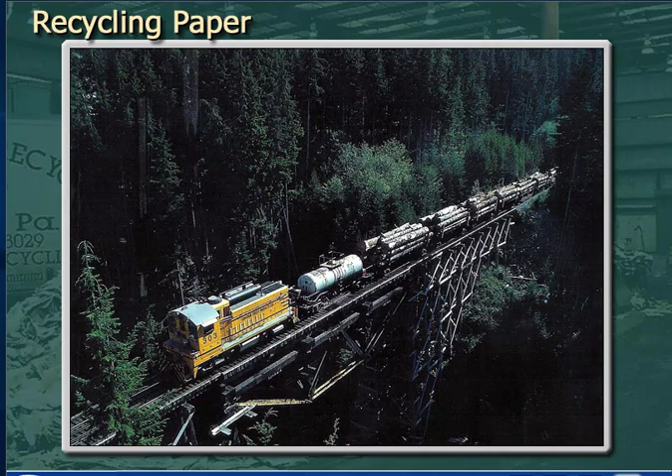The U.S., for example, has increased paper recycling in recent years so that now 50% of all paper used there is recycled. Some of this recycled fiber is shipped overseas, but recovered fiber still makes up close to 40% of all the fiber used to make paper and paperboard products in the U.S. Every day, paper makers recycle enough paper to fill a 15-mile-long train.

A new goal has been set to increase recycling to 55% by 2012. That goal represents an increase over today's paper recovery levels by the equivalent of 23 Empire State Buildings annually filled with paper. Paper recycling has good support from the government, consumers, and paper companies.

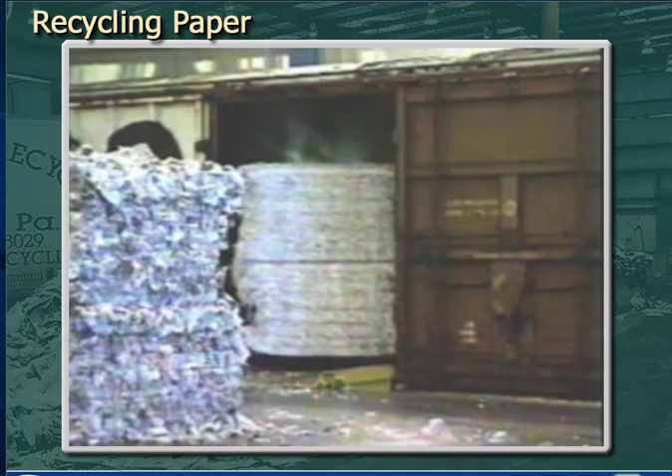But in the long run, it's economics that drive recycling. In countries that have a ready supply of virgin fiber, that is wood, if recycling doesn't make good business sense, it won't happen. From the papermaker's standpoint, waste paper can be a good fiber source, competitive in price to kraft pulp made at the mill and cheaper than purchased virgin pulp.

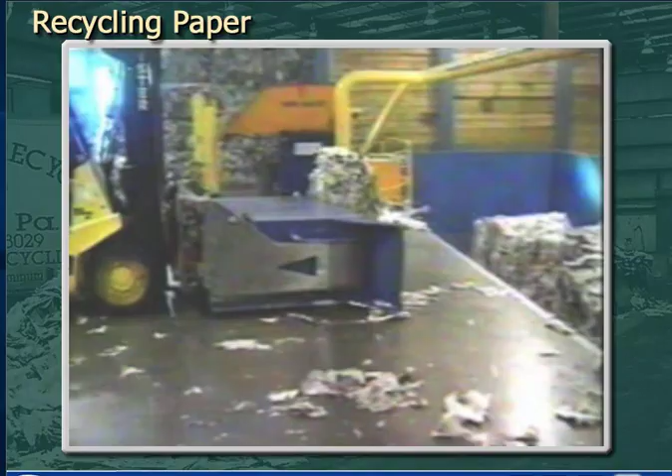Many mills use recycled fiber to increase their fiber supply instead of building new kraft pulp mill capacity. Smaller recycled paper mills can be located in industrial parks near the urban forest and near the mill's customers.

From the standpoint of the consumer, that is you and me, recycling keeps good paper from being thrown into our landfills. Recycling also takes the pressure off our forests to supply all the fiber we would otherwise need. We have more trees now than we did 70 years ago, and recycling is an integral part of our sustainable forest.

Let's review the different types of recycled paper. Recycled paper is classified as either post-consumer or pre-consumer waste.

Post-consumer waste is paper which has been converted into a product, served the purpose for which it was intended, and then discarded by the user. A good example of post-consumer waste paper is old newspapers, or ONP.

Pre-consumer waste is paper created in a manufacturing or converting operation. An example is box plant trimmings and scrap, sometimes called double-lined kraft, or DLK, which is waste generated in the manufacture of corrugated boxes.

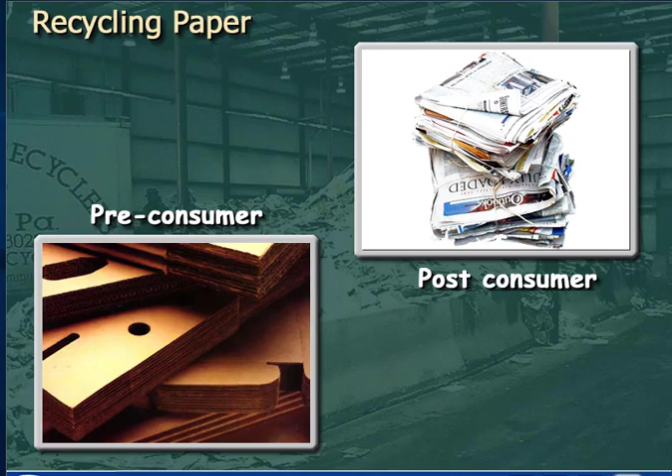For the most part, post-consumer waste has more contaminants and is considered a lower quality grade of recycled fiber. There are a lot of different grades or classifications for recycled papers, but let's look at some of the more common ones.

The easiest paper product to recycle is used corrugated boxes. Over 95% of the goods we use daily are shipped in corrugated boxes, and 30% of the paper produced worldwide is used to make corrugated boxes. That's around 100 million metric tons of corrugated boxes produced every year.

Many businesses have a compactor that bales old corrugated containers, or OCC, and many municipalities collect OCC from homeowners. In fact, in North America, around 75% of all corrugated boxes are collected, baled, and sold as OCC. No other grade of paper is so widely recycled.

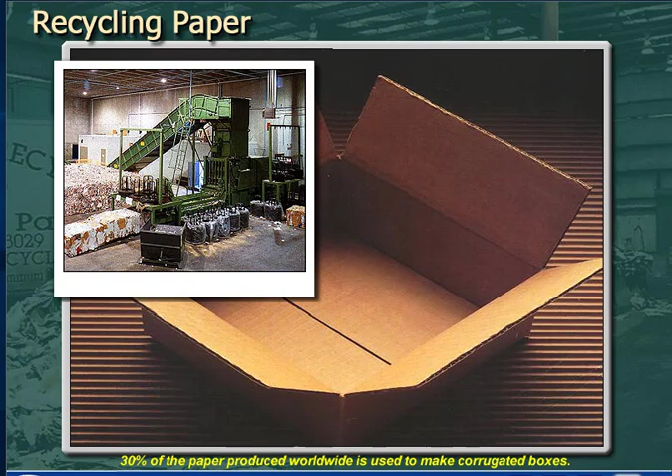What happens to all that OCC? Well, the majority is recycled into other brown grades of paper or paperboard. The most common reuse is to make corrugating medium and linerboard, which are the components glued together to produce corrugated boxes. Let's look at how OCC is processed to become pulp for these grades of paperboard.

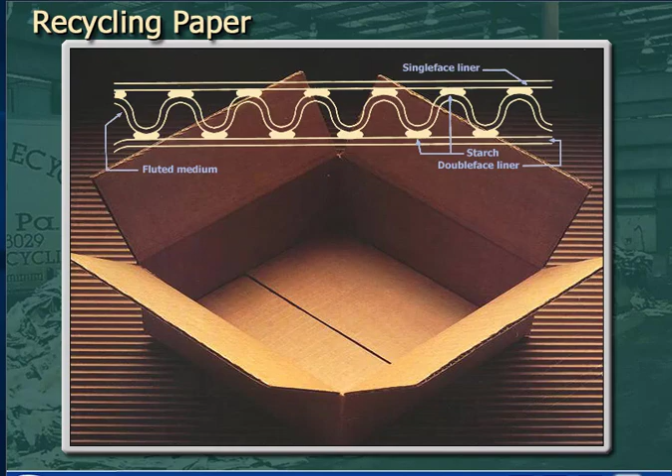You might think that when you buy OCC, one bale is pretty much like another, but that's not true.

Depending on the supplier and the source that the used boxes were collected from, there may be a wide variation in the level of contamination. OCC from one source may be clean and free of other waste paper and foreign material, while another source may be full of contaminants. What are contaminants? Anything that you don't want in the final product.

The stories of bales of OCC containing shoes, guns, money, engine blocks, bowling pins, and entire desks are true, even though hopefully they're not an everyday occurrence. More commonly, the problem contaminants are hot melt glues, waxes, tape adhesives, and other stickies as they're called in the paper mill.

So step 1 in the recycling process is to inspect and sort the incoming bales of recycled paper for quality. Remember, the cleaner the incoming waste paper, the easier it is to recycle it into clean new paper. Really bad bales can be rejected, and other bales can be separated based on the suspected level of contaminants. Then the cleanest bales can be mixed with more contaminated ones to keep the level of contaminants under control.

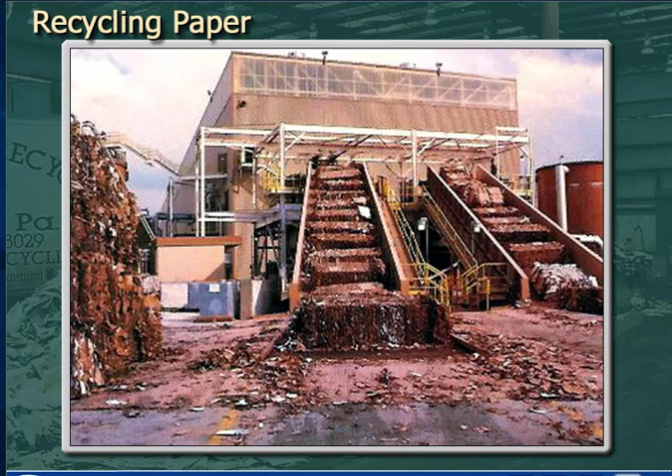Once bales are sorted, they're fed into the pulper so the OCC can be broken up into the individual fibers, that is, to make the OCC into pulp. A conventional pulper looks a lot like a kitchen blender. There's a tub with a rotor in the bottom. Bales are mixed with hot water and the action of the rotor breaks the fibers in the paper apart.

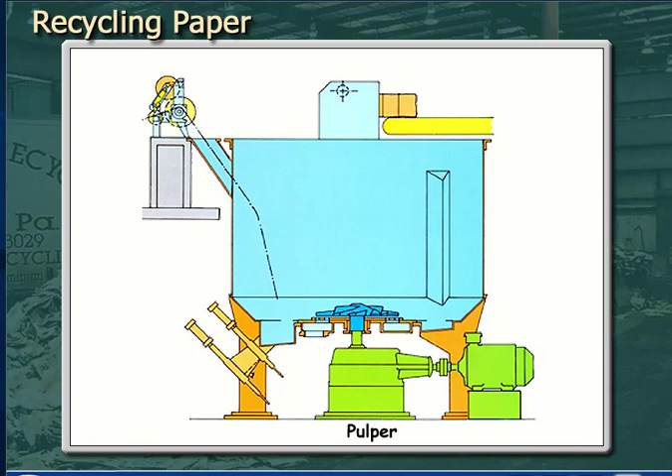Pulpers may be set up to run in batch mode, but most pulpers for OCC are set up to run on a continuous basis. That is, the bales of waste paper are continuously being fed into the pulper along with hot water, and the pulp is being continuously extracted through the bottom of the pulper through a screen plate that's usually located underneath the rotor.

Removal of large contaminants is also on a continuous basis through a junk tower, ragger, and detrasher. During the pulping process, it's important to try to keep from breaking the contaminants into small pieces. It's far easier to remove a whole tennis shoe than it is to take out little pieces of rubber, vinyl, and cloth.

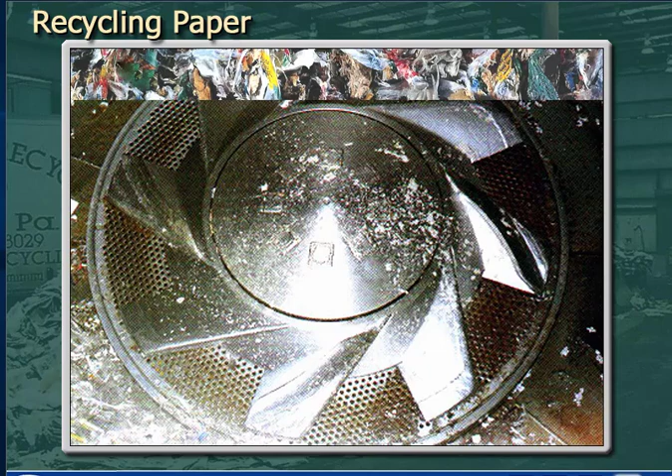As you might expect, there are a number of different ways to remove contaminants from the good fiber. Let's quickly go through the operation of this particular system. First, the action of the rotor breaks up the corrugated boxes into a pulp slurry of fibers, and these fibers are continuously being extracted through the screen holes under the rotor. Unfortunately, there are a lot of other things that also get into the pulper, and these are the contaminants that we want to remove.

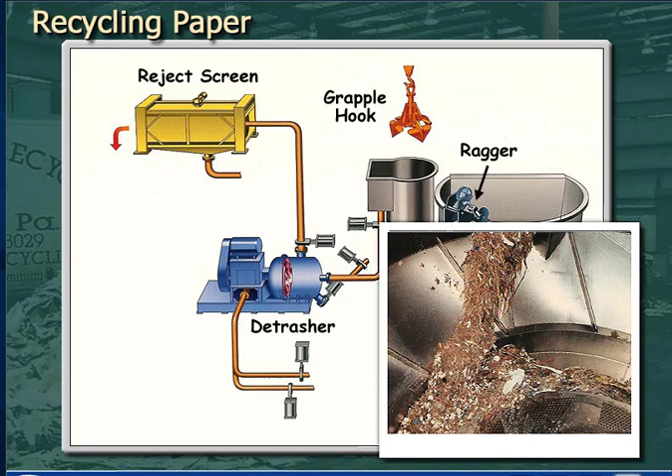The ragger is an old method to take out contaminants, but it's still an effective first line of defense. The rotation of the material in the pulper forms a spun rope from baling wire, plastic pieces, and other material. The ragger slowly pulls this rope of rejects out of the pulper, and new material continues to collect on the tail that is still in the pulper. As the rope is removed, it's cut into pieces and taken to landfill.

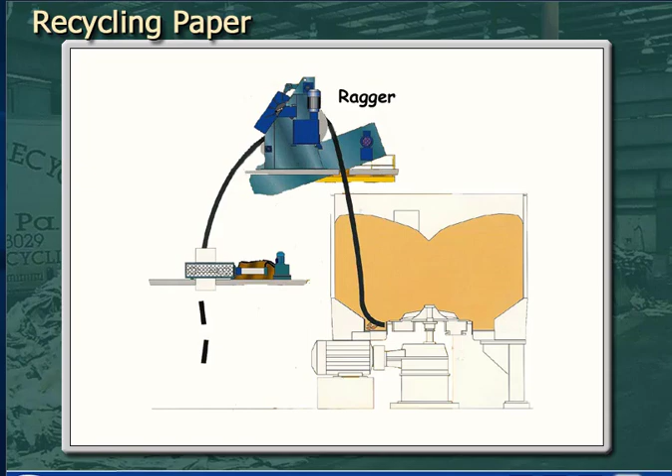A junk tower is a separate vessel behind the pulper. Large, heavy pieces flow into the junk tower, and these can be removed by the grapple hook. Lighter material is taken off the top of the junk tower and sent to the detrasher. The detrasher acts like a separate small pulper to break up the pieces of OCC and separate the fibers from the large pieces of plastic and other trash. This trash is then sent to the reject screen to be dewatered before being rejected from the system.

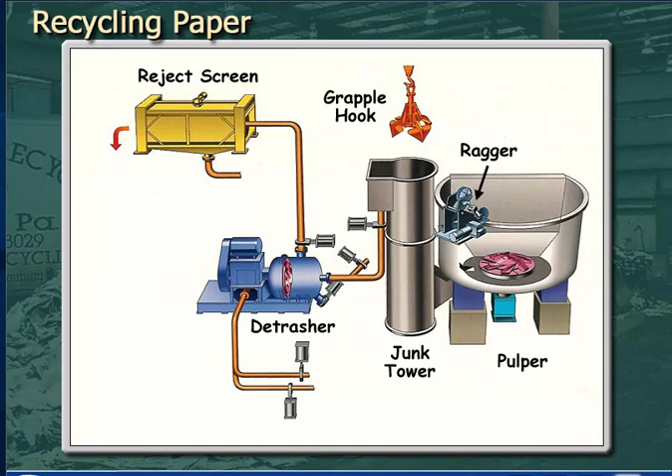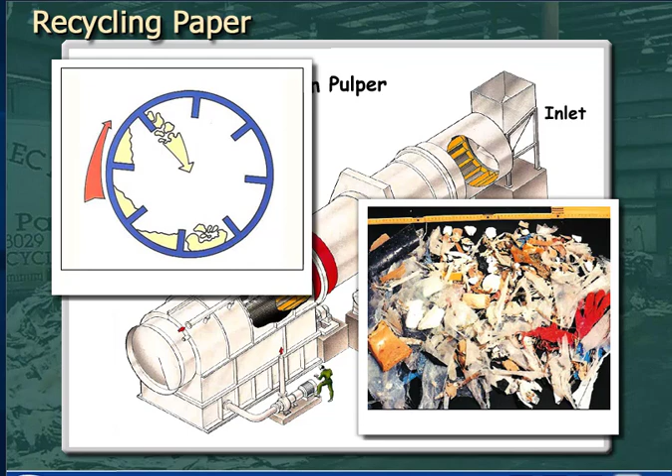This is a drum pulper. Drum pulpers work at high consistency on a continuous basis. Bales enter one end of the drum and the rotating action lifts the paper and repeatedly drops it. Fibers are separated, but the contaminants are left in large pieces, which make them easier to screen out. As the pulp moves through the drum, it enters the screening zone where dilution water helps flush the fibers through the screen plate openings.

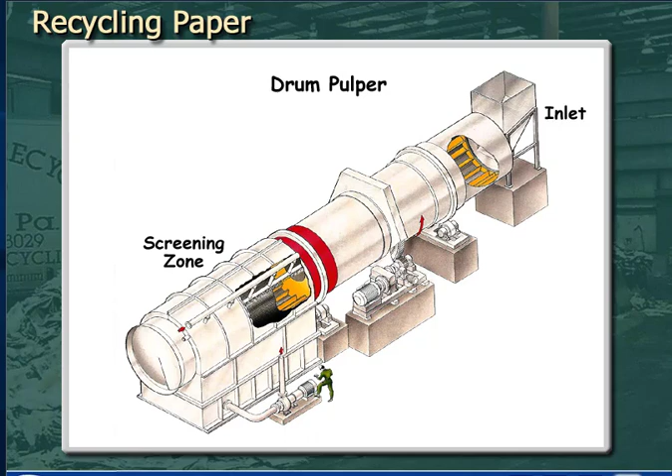Rejects are discharged through the end of the drum intact and fiber-free, so losses are at a minimum. Once the pulp has left the pulper, the pulp slurry is usually pumped through high-consistency centrifugal cleaners to remove larger heavy materials such as staples, rocks, and glass.

The stock enters the top of the centrifugal cleaner on an angle tangential to the body of the cleaner. Inside the cleaner, the stock spins around like a cyclone or tornado, and the centrifugal forces push the heavier contaminants to the side of the cleaner. Heavy contaminants work their way to the bottom of the cleaner where they're discharged, and the good fiber exits through the top of the cleaner.

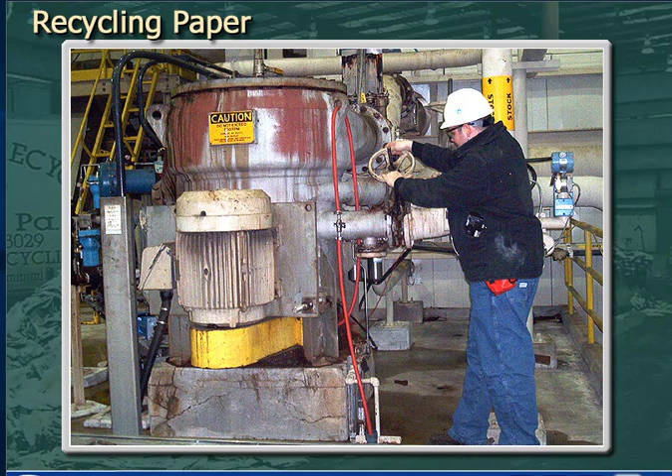Depending on the type of pulper and the final end use for the pulp, the stock must be coarse screened to remove larger contaminants such as any remaining fiber flakes, larger pieces of plastic and wood, and then fine screened to remove smaller contaminants such as stickies and bits of dirt.

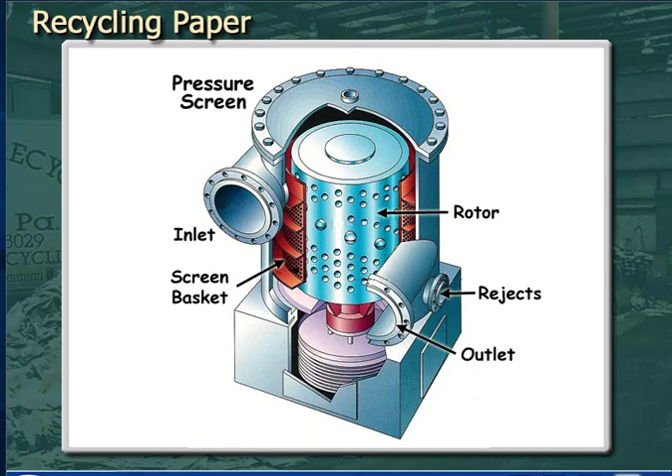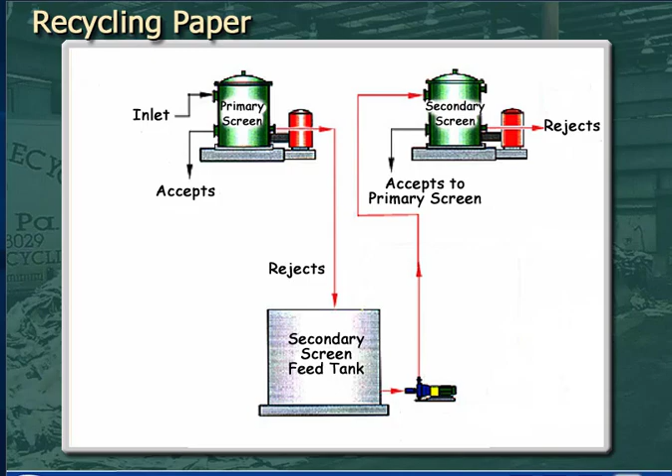Modern pressure screens consist of a screen basket with holes or slots and a rotor that keeps the screen holes or slots from plugging. Depending on the application and design, rotors have many different configurations. Both coarse and fine screening is usually done in multiple stages, arranged so that there's a minimum of fiber lost from each system. In coarse screening, there are a number of different styles of screens that can be used.

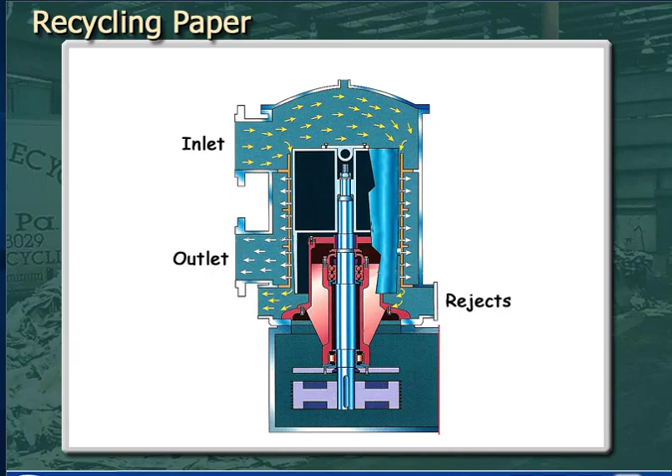Most screens are centrifugal, meaning that the stock flows from inside the cylinder to the outside. Another type of coarse screen uses the opposite, or centripetal, flow pattern, where the stock flows from the outside to the inside of the screen cylinder. This type of screen often doubles as a high-density cleaner, which can simplify the process.

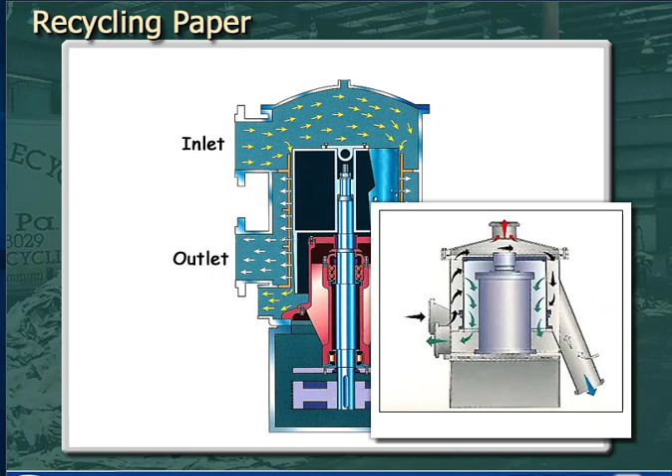Coarse screening normally uses holes in the screen baskets to remove the large contaminants. But in order to remove the smaller contaminants, fine screening requires much smaller slots.

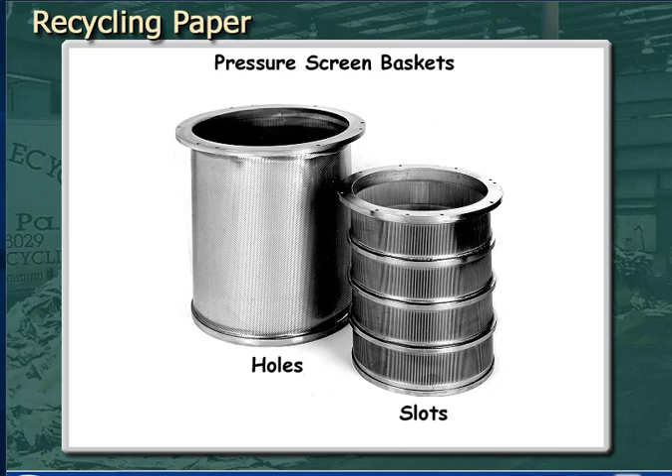Fine slotted screens are perhaps the most important step in any OCC system making high-quality stock for linerboard production, where sheet appearance is of primary importance. Screening out contaminants with fine slots is the best method for controlling stickies, a major problem in most OCC processing plants, so a lot of attention needs to be paid to this step in the process. Doing so will result in much better pulp quality and lower overall costs of the operation.

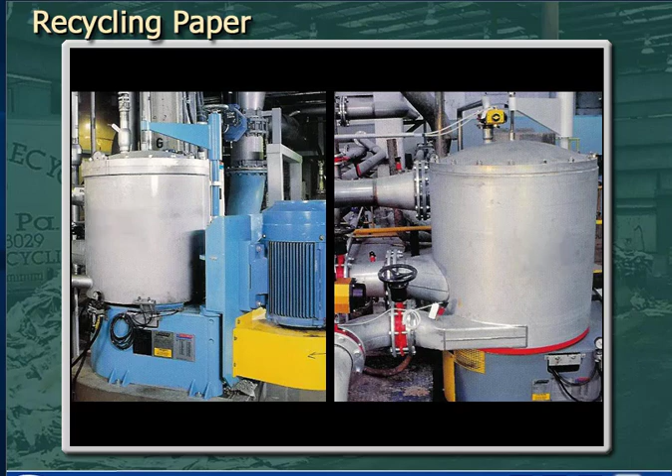Usually arranged in multiple stages, the fine screening operation is designed using low pulse rotors that don't push stickies through the screen plate openings. Modern screens use slots that range in size from 0.15 to 0.20 millimeters, or 0.006 to 0.008 inches, so that extremely fine debris is removed efficiently with little loss of good fiber.

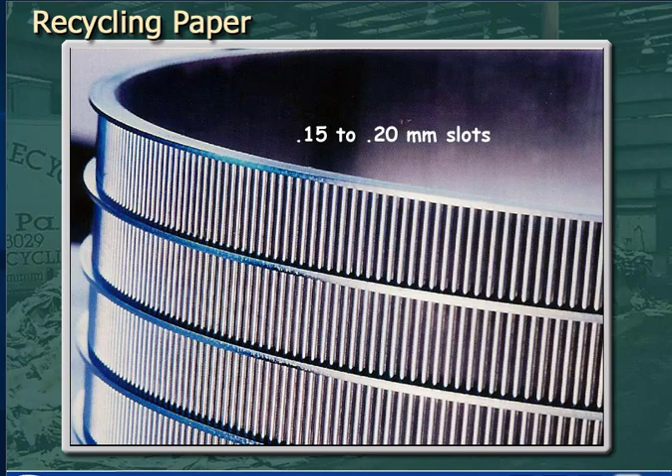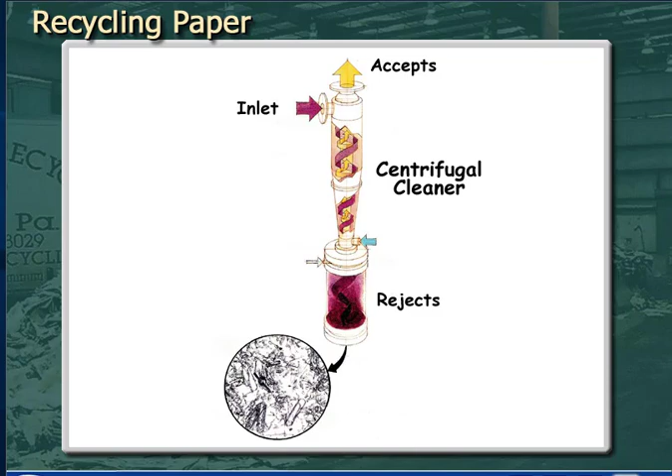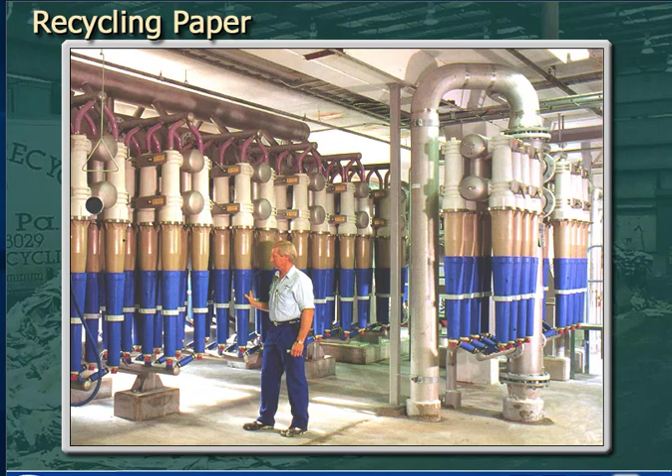We discussed high-consistency centrifugal cleaners a minute ago. They remove the larger heavy contaminants with pulp consistency around 4 to 5%. However, the pulp also needs to be cleaned at low consistency to remove smaller contaminants. Low consistency cleaners work at a stock consistency around 1%, and the action inside the cleaners is the same as it is in a high consistency cleaner.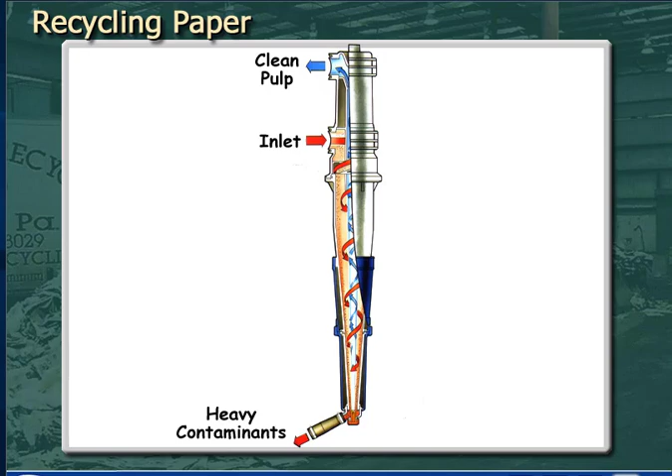That is, the centrifugal action separates the heavy particles such as sand to the outside walls of the cleaner, where they are then discharged through the bottom of the cleaner, while good fiber is discharged through the top. Some cleaners are set up to work in reverse, where light contaminants such as expanded packing foam that collect in the center core of the cyclone are discharged through the top, with good fiber discharged through the bottom. And some cleaners, such as the one shown, separate both heavy and light contaminants. So low-consistency centrifugal cleaners can be used to remove lightweight contaminants as well as heavyweight contaminants.

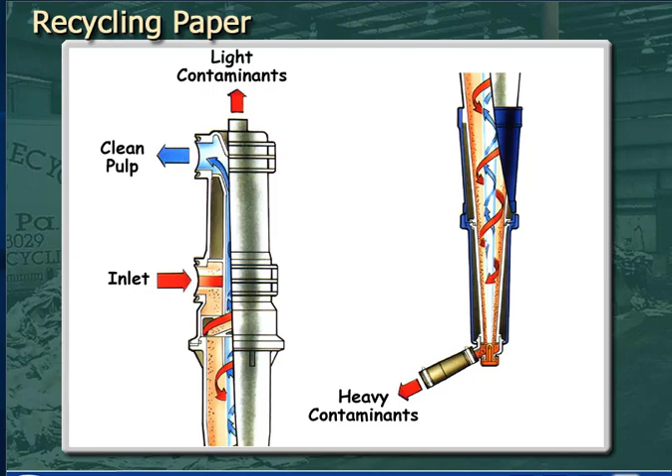This is the end of the first lesson on recycling. What we just described is the process by which OCC would be turned into pulp for use in brown grades such as linerboard, corrugating medium, and grocery bags. Note that we did nothing to remove the printing ink that was on the outside of the boxes, and we did nothing to increase the brightness of the pulp.